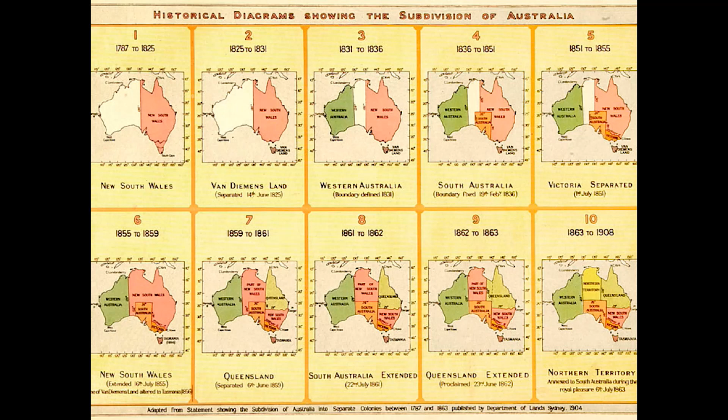We, as a culture, find it quite easy to go camping, Bermagui, no matter where it is, we go there and find great ease after a day or two. We don't worry about making a fire, we don't worry about sleeping in a swag as long as there's more than 2 or 3 people so you feel secure. And we do it quite easily. This little billy can was made by a farmer out of a spoke from a windmill, and he just swung it across onto the fire and swung it back. Great innovation.

Our early houses were pretty cool as well, cool in a real sense. They had verandas, they had ventilation, they had simple things that made the buildings work. But somehow we inherited this sort of Englishness to our thinking, and it's pervaded our thinking for a long time ever since. I guess I'm asking the question, is it appropriate thinking for this country? Because it's getting to a point now where it's frigging ridiculous - a homage to the car, a west-facing building in Sydney that relies entirely on air conditioning for comfort. Doesn't make sense to me.

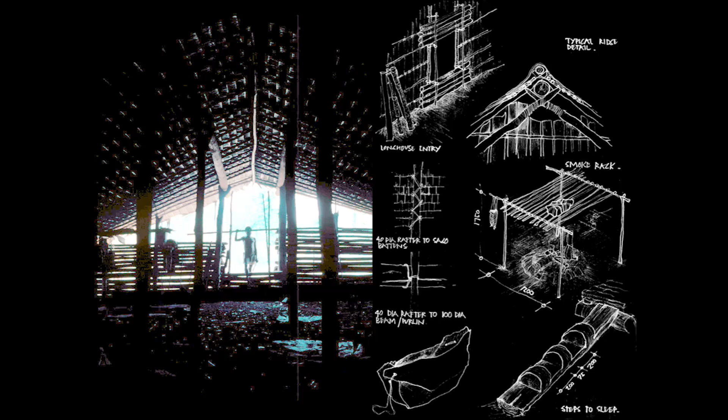And I learned about crude structure, so the more you build, the stronger it gets. But I also just learned about honesty, really, and communication, because I had no language, and in the tribes I travelled in, there would have been like 15, 20 different languages.

When they finish a longhouse, the roof of that longhouse is a two-way curve, an incredibly beautiful building. I looked at it and thought, who was the architect that came up with that shape? In fact, it wasn't an architect, it was the wind uplift that came up with that shape. It's the highest wind uplift area in Papua New Guinea, and that roof is like a turtleback and it holds itself down on the ground.

I also went and stayed with the Foi people on Lake Kutubu. I woke up one morning and looked into this room, and the top of the room, which was about 4 metres high, was black lacquer from the smoke, and then it gradually worked its way down to a flat black on the floor, and the light came through the floor of the building. It was about 180 metres long, about 5 metres wide, and it had just a door at each end. But the light came through the floor, and it's not a good image, but it was incredibly beautiful.

And I realised how beauty can come from something quite simple.

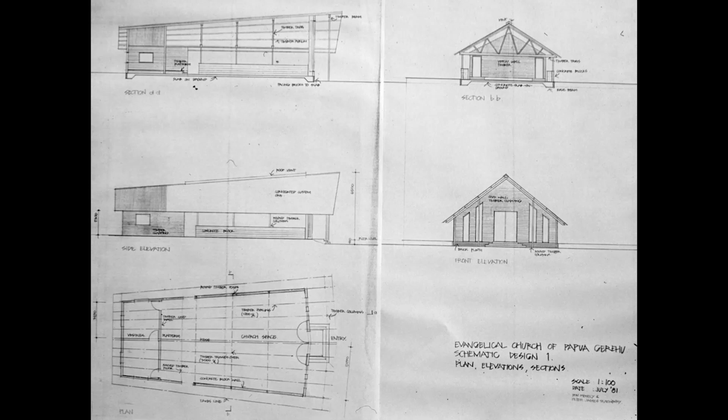This is my drawing of the church we built. It's not a very good drawing, is it? But that's the church we built, and the church is okay. It tapers in plan and section, and it connects with the people because it's like a longhouse. I designed it with my uncle, who's a missionary up there.

One weekend we went away and came back, and these young kids were laughing, and their parents were there. I looked down and saw all the bricks we'd thrown out laid on the ground. And I thought to myself: different sensitivity, no waste. Big lesson. And these were my clients, the pastor, his wife and kids.

You know, I went back to Australia - this is an absolutely true story, and anyone who's been to Papua New Guinea will know this. I went back to Australia and got married, and I didn't have any kids to start with. So this couple had a kid for me. They phoned up one day - it was expensive to phone, and they couldn't afford it - and said, 'We've got a child for you.' And I said, 'Oh, I've just had one.' True story. And they said, 'Oh well, we'll keep it.'

As I was coming back from Papua New Guinea, I could only afford to fly to Cairns, so I flew to Cairns and hitchhiked from Cairns down to Sydney. As I got to Taree, I remembered an old school friend, Nick Gilbert, had started a nursery there. I thought, if I see a sign or something, I'll stop and go see him. Just as I thought that, there's a blue sign on the road with black writing: Gilbert's Wholesale Nursery. I asked the guy to stop the car, got out with my Swiss backpack - canvas, idealistic, very heavy - and got to this old shed, and Nick walked out.

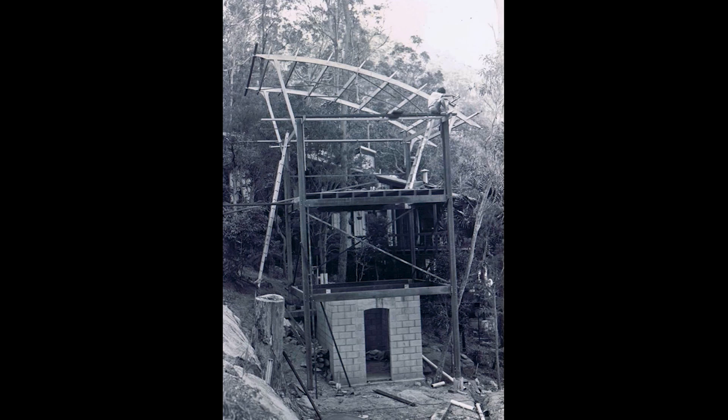Came back and had no work in 1990, and I phoned up Ken Israel, who I'd designed a building for, and I said, 'Ken, what are you up to?' He said, 'I was just about to start building that house.' And I said, 'Well, can I help you?' So with a couple of students, we built this house.

It got a Robin Boyd Award eventually, and it was judged by Louise Cox, who we're talking about today. And I could tell you a funny story. I probably should, to get you all laughing.

She came down that rock ledge there, and she didn't want to visit this house at all. She's actually a very good friend now, so I'm sure she wouldn't mind. And she stumbled across that walkway there and she's grumbling, 'Oh, well, why are we here?' And anyway, Ken, beautiful Ken, who's a macrobiotic sort of king of Sydney, brings her in, gives her a bancha tea, and the jury sort of settled in there, and after about 40 minutes, no one wants to leave. It's quite a beautiful place.

Ken once said to me, 'I don't want anyone working on this house that doesn't have a song to their soul.' And I went, 'Oh yeah, a song to their soul.' But he was right. The house has a song to it, because he had the right people working on it.

Anyway, they didn't want to leave, but they had to leave, so they came across, and Louise was in high heels, which is not a good thing to do on this rock ledge. She gets to the rock ledge and steps up and starts to fall, and I grab her, but I grabbed her in the wrong spot. Maybe it was the right spot, because we got an award.

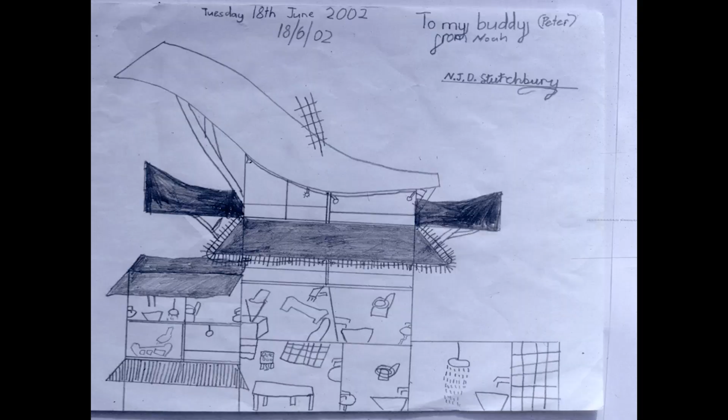And your son does drawings of your buildings, and they're a lot better than your drawings. And this whole thing of passing down is very important, and we've lost that understanding.

4 things for me in architecture, and probably a lot more, but 4 primary: space and light, connection, structure, and the hardest one of all, mood. I'm not sure that you can actually plan for mood. What do you reckon? You elders at the front. It just sort of happens or it doesn't. You can do your best.

But I had a great sort of training from my dad, who was an engineer and built power stations. Built them down here, built them in New South Wales, built them in Western Australia. So there was a strong engineering training, and there was also a strong sort of rural training of buildings. And all these buildings, rural and engineered and sort of industrial buildings, are very direct. They don't muck around. They are what they are, which I like. I mean, I think for me that was good.

And things are done because they need to be done. So if a door's going to weather or if the timber's going to rot, you put a little flashing over it to protect it. You don't muck around with that, and you'll see that later in one of our buildings.

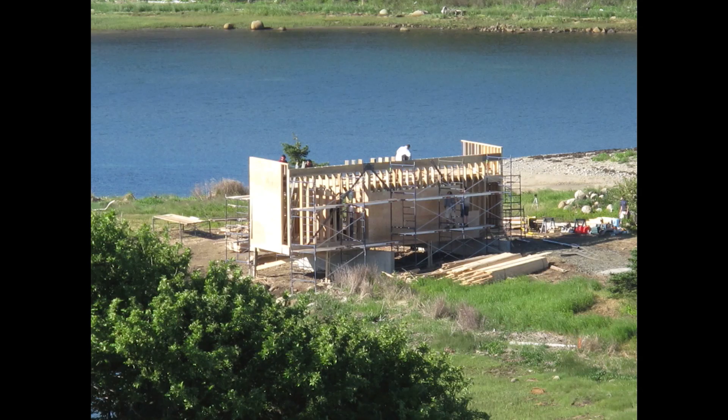Nova Scotia, Ghost Studio, which was the oldest running masterclass in the world up until three years ago—now the Glenn Murcutt masterclass is. Telluride in Colorado, and Rick with his hat on with the indigenous people in Chile, running a small masterclass at Temuco.

This is one of our early houses, and all I'm going to talk about with our buildings is the key lessons from each building—otherwise we'd be here and miss out on the drinks tonight.

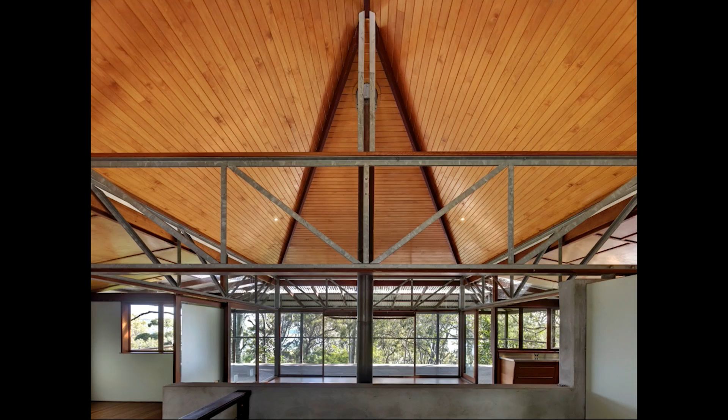The key lesson on this building, done in 1989 roughly, was the veranda and the reinstatement of the veranda. We put that bit of polycarbonate next to the building so we could get the light in, so the veranda didn't pinch all the light from the house. But the people lived on the veranda—they were there most of the time. Because we made doors that lifted up on a pivot and opened to the veranda entirely, it was like one big room, and that's where they spent most of their time.

This building was won by competition at Newcastle University—our first competition win. It's the design faculty, 2,000 square metres, and it won the National Environmental Award because it was naturally heated and cooled. It's designed to put the students on the sunny side of the building and the teachers on the cold side, so that the teachers had to go over to the students.

About 18 months ago, the new board at Newcastle called me up and said, 'We're going to have to put air conditioning in your building.' I said, 'That's a shame, it used to work really well.' They said, 'Well, that's the way it goes.' I said, 'Can you show me where you're going to put it?' So they took me over to the building—you can see those vents, three on each roof. It was hot in the building, but I walked over and pulled the cord on the three vents and the whole building just cooled down. They looked at me and said, 'What'd you do then?' I said, 'I just opened the vents.'

The air conditioning never went in, because we took cool air from down below where the thermal mass was, and we took it straight through the building and cooled the whole building. Very easy, very fundamental.

And then we did a house at Watson's Bay, our first big house. I did about 100 drawings for the design of this house, and I couldn't work it out. I didn't know where I was heading.

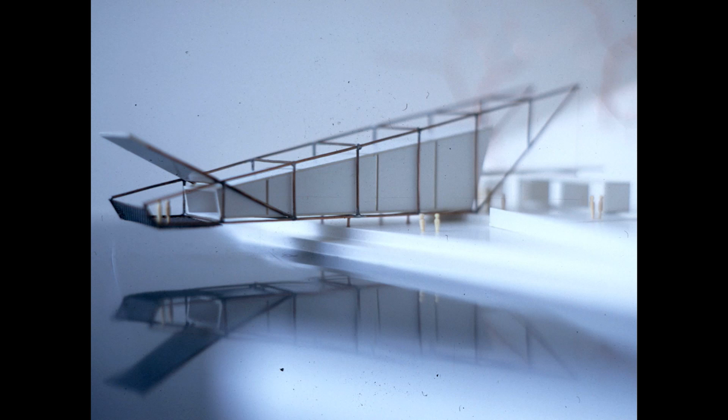And we came second in the competition for the Snowy Mountains Visitor Centre. But I quite like the design.

It's remarkable how we all know that our designs reappear along the way. We should never be fearful of throwing a design out, because they re-emerge at some stage in some shape or form—probably a lot better.

There's a little building in Kangaroo Valley that is completely recyclable, dismantleable. That was the experiment, but also it lifts its lid to the escarpment, to the sun, and that drops it down, so you can heat it really quickly. But the big thing again was the outside veranda and living in the undercover space.

Students have often asked me, how do you design a building? I'm not really sure how you design a building, but I think research is part of it. I think doing a lot of research helps you design a building.

We were designing the archery centre for the Olympics, and it was a landfill site, so it moved about 150 millimetres every 6 metres. So I thought of the centipede—you've got fixed bits and you've got moving bits that accommodate movement.

Then I went to Swan Lake Ballet one night, and the ballet dancers lie down on their backs and all move their feet like this in sequence. I thought, what a lovely form for a roof. So the roof of the archery centre came from that.

It's a twisted roof, but it's separate from the building, because if there is movement, you don't want the roof and the building connected—otherwise it's all over the shop.

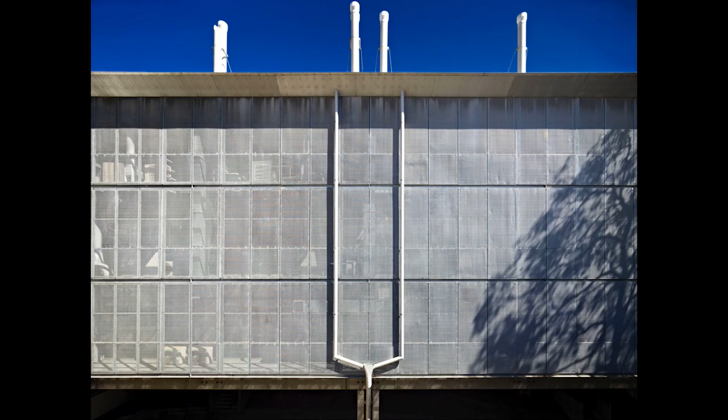We've always got to think for ourselves as architects - it's really, really important. We did this precast concrete building, 5,000 square metres, a life sciences biological science building. We put all the services on one side, the east side, and made access to those services. So as you're working in the lab, if something needs to be done, you don't shut the lab down - you just go to the side on the walkways and service the building.

We did Spring Water as well, which was a bit of a backlash against that curved truss project that took so much time and energy - I think in total it's like 560 hand drawings. This one was like 5. And I think it's just as good, in a different way.

I spent a lot of time on site, but really it's just a concrete tent on the side of the hill overlooking the harbour. But it's quite nicely done. All we've done with the concrete tent is infill it with off-the-shelf items like chicken louvres and standard door systems. So what resonates when you're there is the strength and clarity of the concrete, and everything else is secondary - it's just like a cave on the side of a hill.

The client, one of the great clients of the world, is about this high, a Chinese Malay doctor. He left his family, who were a royal family in Malaysia, and came here with nothing. He didn't want anything - he set up his own practice and got on his feet again. He said, 'Pete, I just want your best contemporary work.' I went, 'Oh, is that all? No worries.' But he did say he's got an amazing art collection and needs to display it somewhere, preferably in a long corridor or something like that.

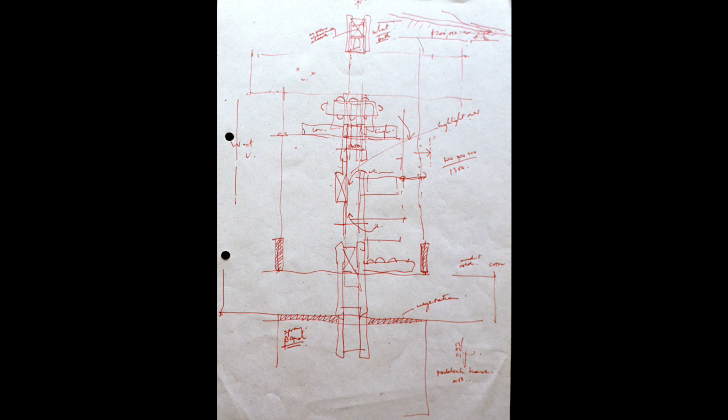That drawing is telling me that there's two central walls inside which is all the thermal mass - it's the library, the laundry, the bathroom, the kitchen, it's everything. And then on either side, one side is living on the sun side of the house and the other side is sleeping. It's that simple. It was built very light framed, for about 1,800 square metre. It was prefabricated and brought onto site under the two walls, so one side is high and one side is low. Very simple framing, very straightforward building.

Then you take that experimentation and thinking into another area - if I put a standard frame up, you're still experimenting with structure because you've developed a two-post system, two-beam system and flat plate steel. So structure is still part of your thinking in a flat roof. If you change the form under the flat roof, you get a veranda - put a triangular form under a rectangular roof and you get negative spaces, which are your veranda. It's very economical, this was 1,900 a square metre. Because it's such a straightforward fibre cement building, you put big blades on the right-hand side that let the sun in winter, keep it out in summer, and cross-ventilate it - that's the story. Then suddenly it becomes architecture because hopefully you've got a bit of a touch after that as well.

These early drawings are really important - these drawings tell you what you're thinking, how you're thinking, and why you're thinking. There's a big forest on the top of the drawing there, but that's south, so that's where all the shade is.

That's where you want to be in summer, but it's not where you want to be in winter. I lived in a house on the south side of the hill in Sydney - a little fibro shack that we bought in 1980, me and my brother. In winter, it was freezing cold. I realised that architecture is also about comfort - not just emotional, spiritual comfort, it's about physical comfort. If buildings aren't, to a degree, comfortable, they're not going to be nice to be in. They'll be okay and interesting, but they won't be comfortable.

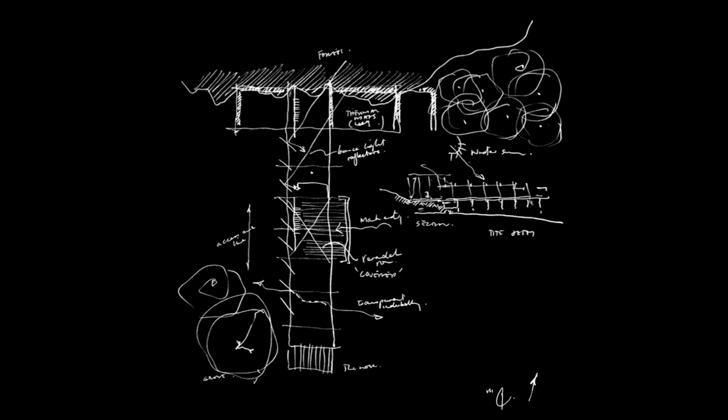So this one here - because we lifted the building off the ground, it was a floodplain and you could feel the water in the ground when you walked on the site, I didn't want that water in the house as a notion, as a feeling. So we lifted it off the ground and made, on the left-hand side, big structural blades that bounce the light into the building from the north. The covered room's in the middle - it's now repetitive in our work, the covered room, it's the main room in the house now. The building sits above the ground, allows the kids to play underneath it, and thermal mass on the left-hand side. But again, there's no point doing all this sustainable stuff unless you make architecture as well.

So you bounce the light off those blades into the single loaded corridor. You open the bathroom - not the toilet, but the bathroom - onto the covered room and the kitchen and living area, because you're a family and no one's invading your privacy unless they come in. So you can live like that, you don't have to live with the bathroom separate. If someone's having a bath, e.g. the kids, you can keep an eye on them while you're cooking.

And then we did the shearing shed. If I hadn't visited the site, I would never have known that wind changes direction because of Mount Albert in the background. So we were able to reorientate the shed according to the wind. The owner of the property has a beautiful, antique, old heritage shearing shed, but it didn't work. He called me up one day and said it's 38 outside and 45 inside the shed - I need to reduce the temperature.

This building, of all the buildings we've done, is exactly what it needs to be environmentally and physically. Its aesthetics come out of that. I think we have to have a touch in how we do it, but this is an interesting building for me in that sense, because it's precise and accurate. I don't think it could be challenged at many levels in that sense.

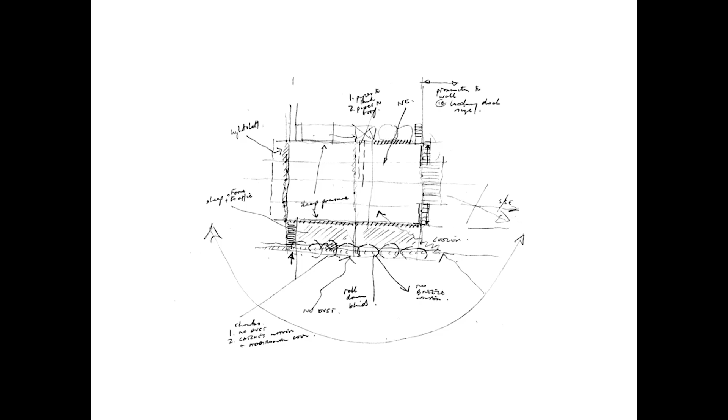The initial drawing is, again, very important. It puts the water on the cold side of the building, and it puts the shearers' recreation area on the morning side of the building, because that's when they most need the sun. It shows that loading — we increased efficiency by 25%.

We don't need any mechanical loading of the trucks. The shearers are the hardest working people I've ever met, and I've been brought up with shearers. They run a property and then they shear from about 7 in the morning till 3 in the afternoon — back-breaking business.

Great guys. So the water runs down onto the salt bush. The sheep can eat the salt bush, but the wet salt bush catches the dust from the yards.

The cross ventilation comes through the chicken shed louvers that we used on spring water as well, etc. That's the lowered ceiling that catches the heat from the sheep and takes it across to the shearers, blowing it down with those 2-way fans which are operated by a generator. And the cool air is taken from under the building.

There was not one complaint from our clients.

The sheep. I didn't think you got that.

The shearers call this building the resort.

The Aramax roof, as you probably all know, spans 20 metres and cantilevers 5. We used it as structure, self-supporting, and it supported our ceiling systems. It was invented by a farmer from Orange. We're now working with him on a prefabricated building for the Aboriginal people in Arnhem Land, based on this as a wall and roof system.

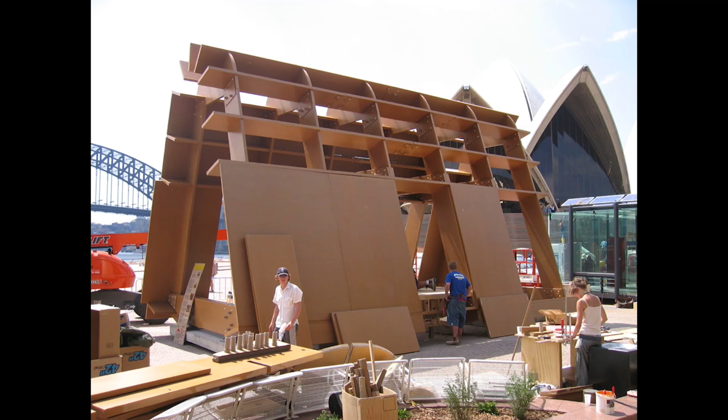We did a cardboard house for House of the Future on the forecourt of the Opera House. There were 6 different materials that were used. There's no tabulated research on cardboard, so we had to do all that ourselves for 2 months. It's in the university with Colin James.

And then we built this little house, 65 square metres for $18,000, completely recyclable. We had enormous interest from aid people abroad in terms of hurricane and cyclone relief, but unfortunately Visy in Melbourne wouldn't support us, so we couldn't go ahead with it.

We came down and had a meeting with them. This is the airport hangar that further developed the use of that material, which is a self-spanning material. We reduced structure in this building by 56% because you've got no secondary structure, and therefore we reduced costs by about 30%.

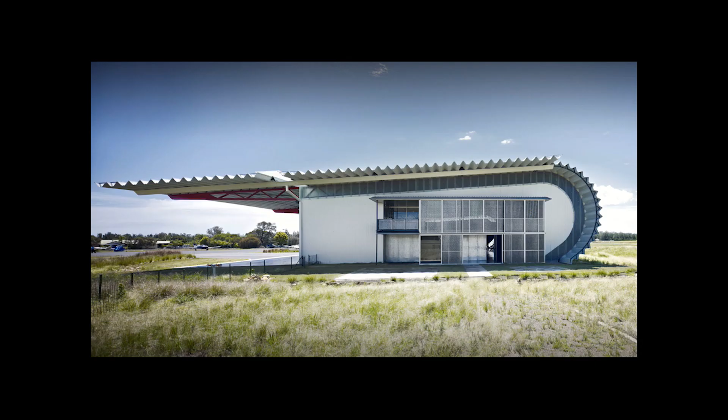So still experimenting. And they call this affectionately the prawn, which I take offence at.

No, not really. But you can see there we used one of the sheets as the gutter and just hung it off the bottom.

And then cliff face houses on the side of a cliff, and we put it down below the road. All the adjacent houses are above the road. So we put it down and all the neighbours said thank you very much — they suddenly got a view of the water.

But it also got us away from the noise of the road and meant we could use the cliff as the back wall. And when you use the cliff as the back wall, you've got an aesthetic, you've got an enormous thermal mass as well, and you've reduced the amount of building you can do. So the builder's price went down by about 10%.

And we have God to thank for that.

We used the wall, and you can see the gap there between the floor and the cliff face. We had to cut the cliff face because it had been damaged, so we're walking on it, and we've got a path there to some rooms.

But it's a wonderful thing. You walk into this building and you feel like you know where you are. Once you reach the top of the building, you reach the sky. So there are three levels: the ground level, which connects with the bay; a mid-level, which connects with the cliff face; and the top level, which connects with the sky.

And then we put perforated copper screens on so they could manage the light off the water from the west.

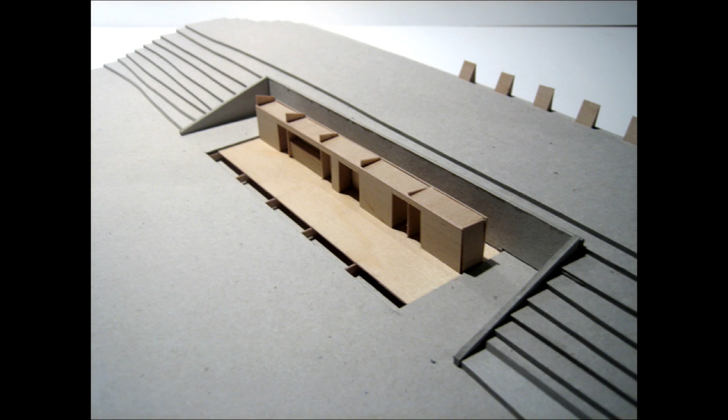So we made a central wall, put the light fittings, all the power, all the hot water systems, all the pipes, all the showers, all the stoves into the wall, along with some thermal mass, some rocks we got which were thermally rated. We held the heat in the wall, recycling 98% of the heat in the building.

And this twisted roof meant that the heat goes up to one place, you catch it, and put it back down into the floor and into the wall. We also took the heat off the car and put it into the building as well.

I said to the office that if we win this competition, we'll go to Japan, which was a really silly move, because all the money we won in the competition went into Japan, which was fine.

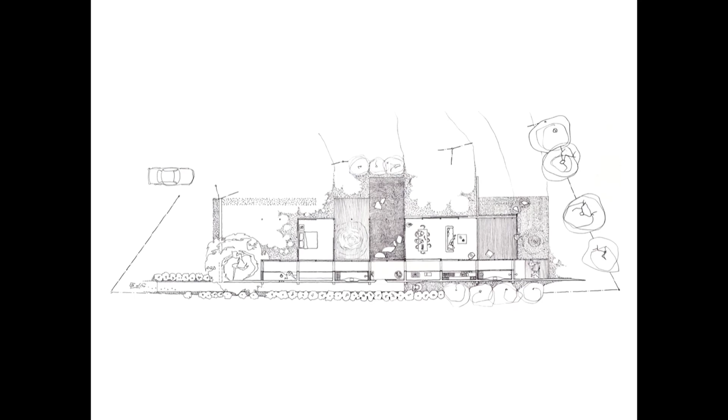This is, we always do a hand drawing as our first presentation. This is the initial hand drawing of the plan only.

And this fellow taught me a serious amount about design. We started here, and he took the design all the way around here, up to here, across, down, over here, back to here, and then he said, 'Now Peter, we're back to the origins.' And we'd lost about 15% on the way. It was a great lesson.

And we worked with these three wonderful people. The guy on the left-hand side has become quite a famous Japanese architect, and his workmate Honda. The guy on the right-hand side was the intermediary who could speak English, French and Japanese. I saw him this morning - he's just graduated from final year architecture at UTS, and he was a fashion designer when I met him. But because of this building, he went and studied architecture in Australia.

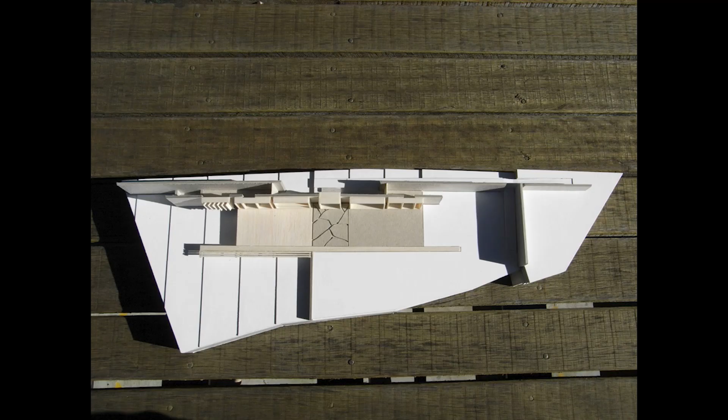Lots of models. The idea was we built a strong wall to the street, to the urban street. This is where that ramp occurs that I showed you in the landscape. And then we built lightweight buildings off that wall - some of them are sky buildings on the left-hand side, and some are ground buildings. Very simple idea, but it's all about the courtyard you make and the urban street. There's a samurai house and a geisha house associated with this building, so it's a trilogy of buildings.

Because the street is where the sun was, there's that ramp I was talking about. I wanted to get sunlight into the building. We had 86 degrees Celsius water from thermal springs to heat the building, and cool with a heat pump, but it was the sunlight in winter I needed. So I lifted the roof off the thermal mass, off the concrete, put a skin of water there, and bounced sunlight into the building.

From the street side, the urban street, you see buildings adjacent to this one, adjacent to the wall, into the lightweight pavilion on the left-hand side that changes with the light. A twisted roof takes the humid air out of the building through ventilated windows, but it also picks up on the diagonal of the site, and increases the length of the building because it's diagonal, not a rectangle.

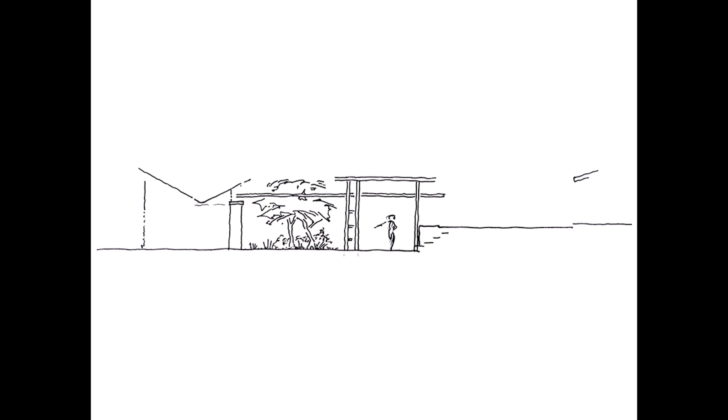This building is in Seaforth. The clients came to me—old clients I'd done a building for 25 years ago—and they said, can we have a dining room? I'd worked with them before and knew they could accommodate things, so I thought, why don't we have a dining room in the garden? They said, can you make it so we could seal it if we had to? I said sure, we'll allow for a couple of canvas blinds, which we did, but we've never put them in. They fortunately ran out of money before we got to the canvas blinds. We know how to spend money.

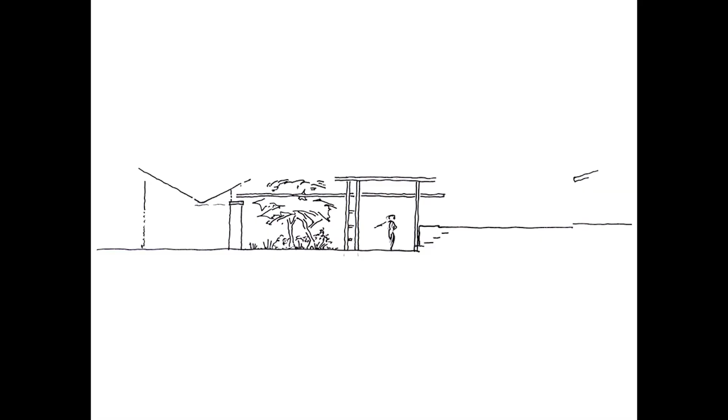So here's the garden, here's the courtyard. That's a little renovation, a little upturned roof on the back of the building—you see it kicks up there, we did that. We added about 2.5 metres on the back of the building, which is here. We made some portal frames to connect the structure all the way through, visually and physically.

We put a covered walkway on the right-hand side where you enter the house, and an open one on the left-hand side, making a courtyard and a herb garden on the left. The dining room's in the distance there, just there—looking up to the old building we did, which is a design studio from 25 years ago.

I'd say 7 out of 10 times when I go to visit—because they're very good friends—they're sitting out in the dining room. I promise.

Invisible House, which is on the escarpment overlooking Megalong Valley. Tough, tough, tough site—westerly winds that hammer the site, sou'westers that bring the snow, easterlies that really thump it when they come. It needed to be a tough building.

We recycled all the timber we used on that curved roof as the ceiling. This building was built by one builder who did all the work himself. He had 2 apprentices, and only an electrician and a hydraulic guy to help him. He did all the steelwork, all the concrete, all the timber. Took him 3 years and 3 skip bins of waste. It's an isolated site.

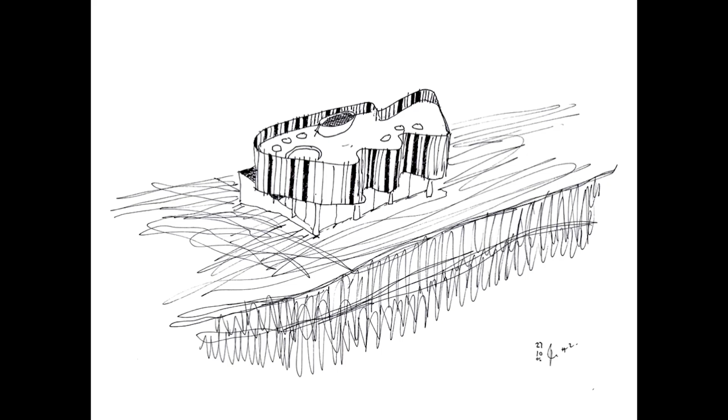Our latest house is on the wonderful pediment of stone which is North Head. It sits on North Head, and I don't like the way houses sit there because I think they crowd it. So we lifted the building off North Head, off that wonderful pediment of stone.

It was 400 feet down. We still wanted it to be horizontal as a band, and it had to be really durable because it's in one of the worst weather conditions in Sydney. But it needed to be a soft form as well, because I felt the hard forms in that place weren't really all that pretty.

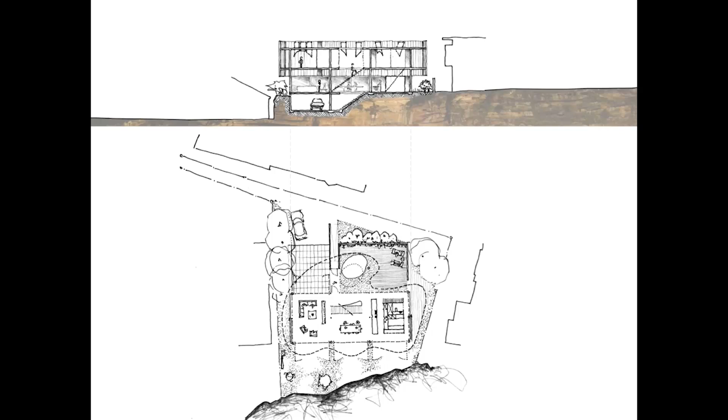But you also can move from place to place depending on the weather. You actually live on the lower area garden on the left-hand side, a series of 3 or 4 courtyards, with bedrooms upstairs. I'm very keen on discovering simple elevations. It's copper, concrete and glass, so it never has to be touched. The upper form is the veranda for the lower form.

That pool there is a plunge pool, but it's also a register for the sky -- a through skylight that goes all the way to the sky. So if it's raining, you see it in the pool, like there on the left-hand side. And if clouds are passing over, you also see it. It's a private courtyard.

It has edges that are very fragile, except when they're shut, and that's the only room on the lower level. All the columns are sized according to their seismic loading, so they're all 3 different sizes. The biggest one is 900 and has all our services and switching in it, and the smallest one is 300. So when you look at the building, you can read its seismic loading through its structural system.

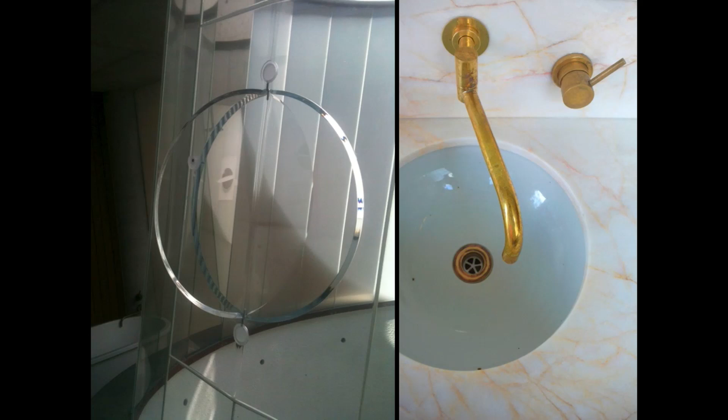Jane Beard did all the sinks, and it was just the same price as buying them off the shelf. And we had to invent some window systems for the particular walls. The owner complained of the moon waking him up at night time, so we did one different skylight.

And what I love is the curved line against the horizontal horizon, this hard, straight line. It's beautiful seeing a curved line against that, something I didn't anticipate.

You can't do great buildings without great builders and great project architects, and I acknowledge them wholeheartedly: John Durham and David Watson, and I love his socks.

And along the way you meet some amazing people. Ian Athfield, who died in January, 74 years old, one of the great architects and one of the great raconteurs of architecture in the world. Personal friend, and what a loss.

Rick Joy, very close friend, taught with him in Vermont two weeks ago. Ran a masterclass with him.

Mr. Frampton, who wrote for us in the Gold Medal Tribute, wonderful friend. Always have lunch with him in New York. Nice guy.

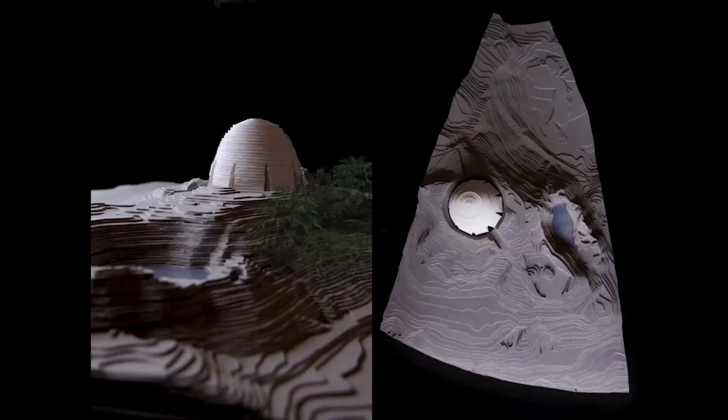And a competition that's almost about to be constructed, which is a 1910 nurses building in Sydney, the new Community Arts Centre, which has heritage listed arches. So I said, well, let's just put some vaults through the arches.

And the heritage consultant said, you can't do that. And I said, well, you know, we're not touching the arches, we're just putting some vaults through there. So we're celebrating the arches. He said, oh, I guess we are. You can always talk them into it, I reckon.

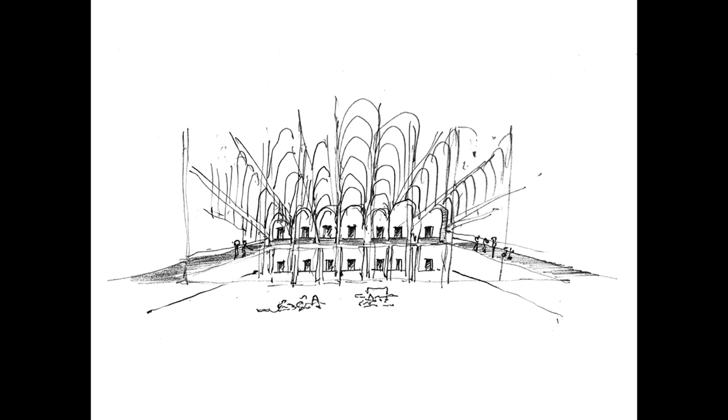So we put seven vaults through the arches like that. We took out the guts underneath the arches, and we made a beautiful big indoor-outdoor room. Very simple idea. And then we put some lovely openings through those arches so we had secondary rooms and a lovely walkway around the void space that we made.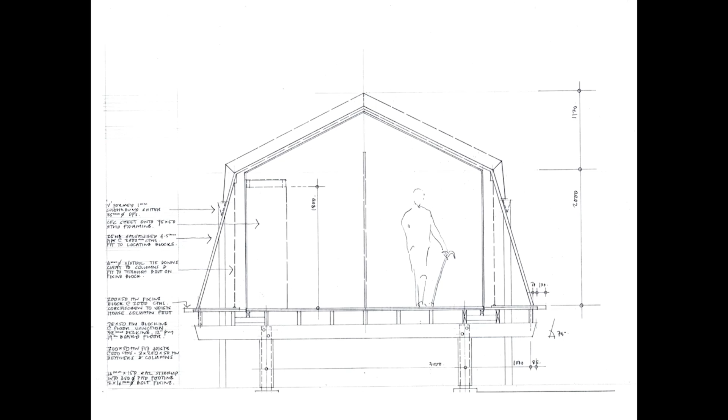And the last building is the building I live in with my partner Fernanda and the kids when they're there. It's a $5,700 tent from South Africa, and the total cost of the building is $38,000. We've been there for nearly two years.

And I got rid of a lot of stuff except for the flat screen TV for the rugby. Sucker for that.

And there's the kitchen in the distance. Noah, my son.

Prefabricated kitchen, an experiment in prefabrication. A friend of mine made it, $1,900, the entire kitchen, leather handles, exposed plumbing, the bathroom.

Single skin walls on a timber frame, all prefabricated, a single sheet of thin plywood where you want your services and lighting. We designed our lighting, $35 a fitting, just a bit of pipe cut on an angle, up in one area, down the others.

The pink bath from the old house, so when it gets cold, you get in the pink bath. And the flats next door love the fact that we didn't build a big house.

Couldn't be done without a great team of people over the years. We all know that, we're indebted to our friends and our colleagues: Phoebe Pape, Richard Smith, Fergus Scott, Professor Max Irvine, all these wonderful people, Belinda Koopman.